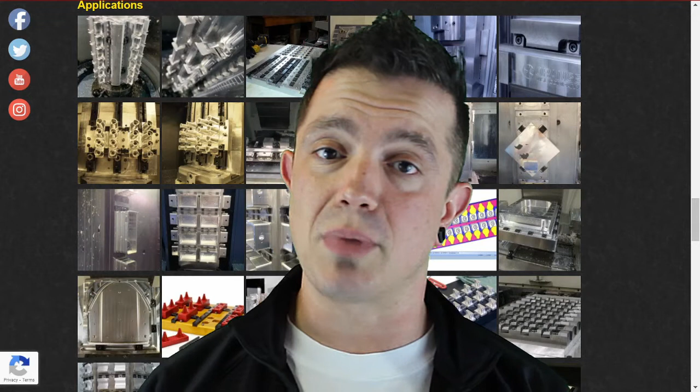Improving your spindle uptime. Now, whether you're an OEM manufacturer or you're in a job shop, stay tuned. I wanted to go over some tips and tricks for clustering parts. Now, if you've been online looking around for more solutions, you may recognize the website behind me. I, of course, am today going to be showing you a little bit about MiteeBite.com.

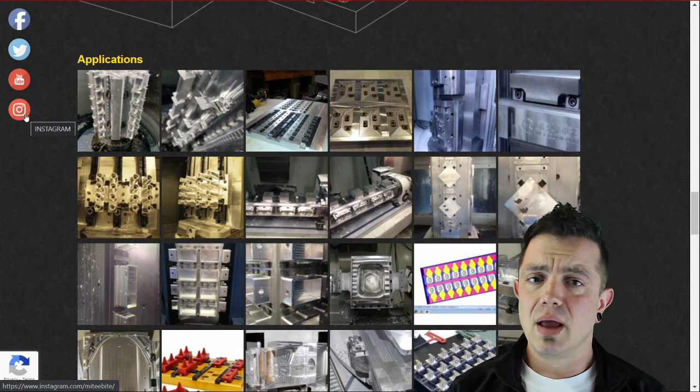I love their website. One of the reasons is they have application photos. Another reason is if you go here to their social channels, they've got more application photos. And it's great to have ideas when we have a lot of parts coming through to kind of stimulate the brain. And they've got a bunch of applications here where you are able to find different ways to hold different

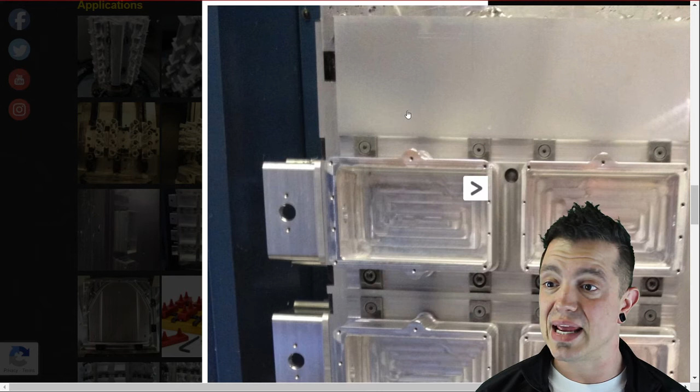parts. Now, some of you might be tuning out because you think this only applies to OEM. However, I promise there are principles you can employ at a job shop to still translate over many jobs instead of getting very specific. Some of the options here, they're on horizontal tombstones. Now, it does not mean we can only do these on horizontal tombstones. These applications can be taken to verticals in a pallet change type system.

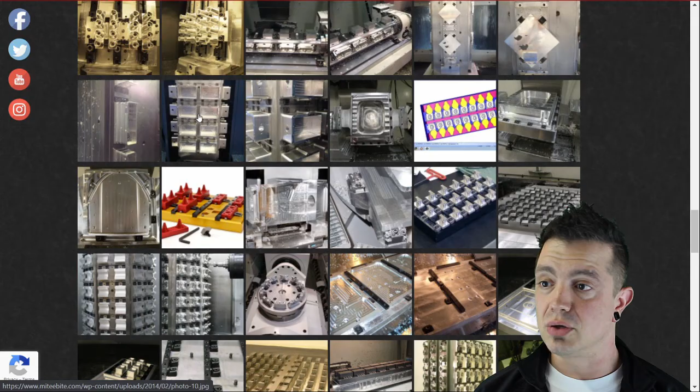Now, it doesn't mean you need a pallet changer. There's other solutions for that I'm going to touch on a little later in this video. Whether you're running bigger casings like this, or you're running a horizontal and you're trying to cluster parts so you can get milling into multiple stations at the same time, it's always a great idea to consider clustering. Of course, if you're doing a very small run, you might want to think about it a little bit differently than these very finite solutions here.

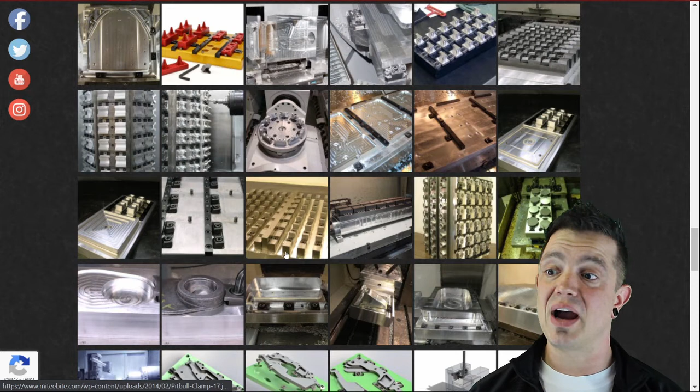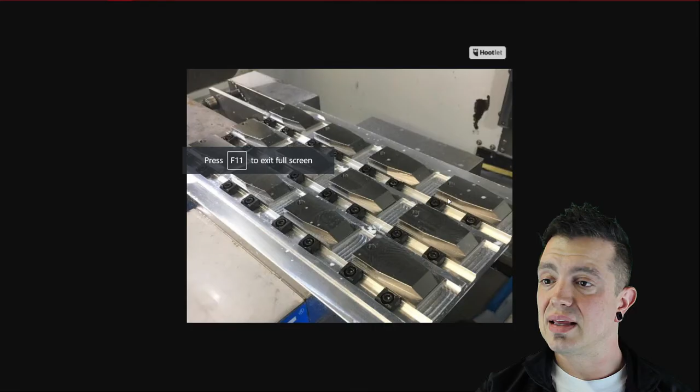One of my favorites, of course, is the Pitbull clamp. It's extremely versatile, low profile. Honestly, using these clamps a lot of the time, I just order the stock a little bit higher so I could hit 5 sides of the part, flip it over, face it off, finish whatever I needed to do on the back side. Here is another example. This time they're just holding the fixture in vises, which is a solution instead of removing the vises to set up your vises to accept fixtures.

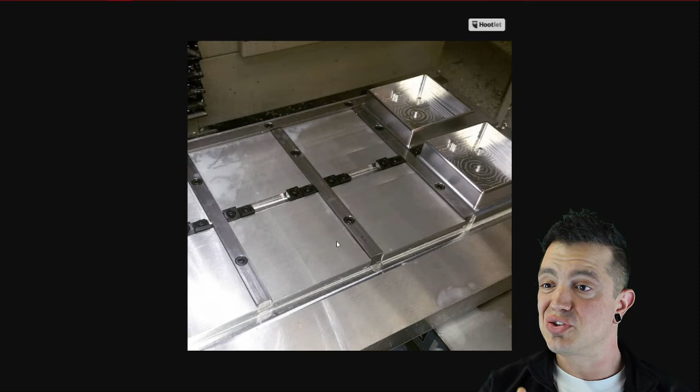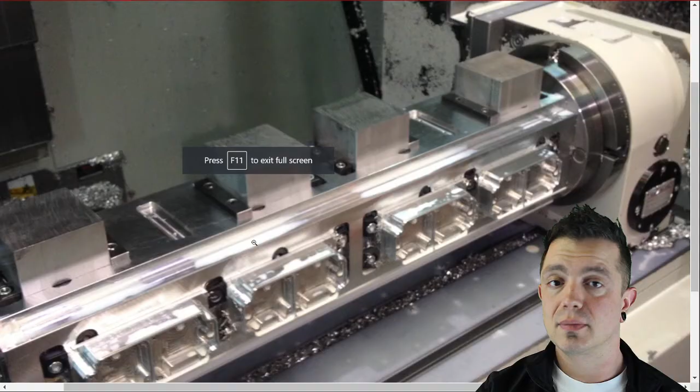Looking at this fixture setup here, you'll see they've got the finished parts up there. These ones are empty. Something to consider here is whatever material you're using in that size, it doesn't have to be the same part. I've got some more examples of those. Here's an example on a rotary fixture where they've got it lined up. They've actually got different part families on each side of the rotary.

Again, when you're in a certain work size, I had a lot of times where parts would come in and I could use technically slightly smaller stock. When you're talking about saving an 1/8 inch or a 1/4 inch worth of aluminum, but adding to your setup time and your processing time, it's not always an equal trade. When you can bulk cut a bunch of material or have a fixture like this that accepts certain material sizes, there's a benefit to not always shaving the most material out of the job. It's one of those penny wise, pound foolish kind of situations.

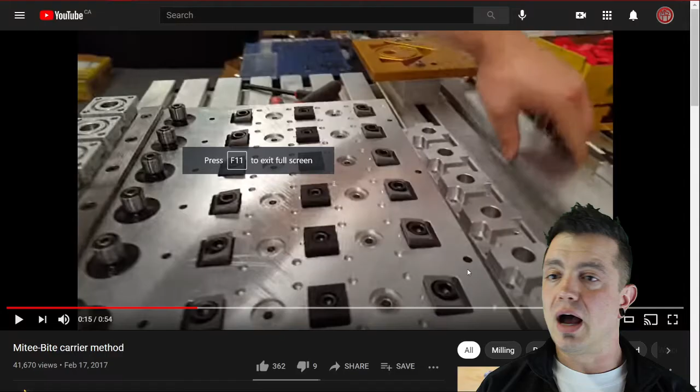This is a video you can find on the Mitee Bite YouTube channel. It goes over it a little bit more. I wanted to point out a couple things here. So you can see over here on the left-hand side, they've got ID clamping mandrels. Now they have the top lock version, so you'd need to have a through hole here. However, they also have a side lock version where you can lock it from the side.

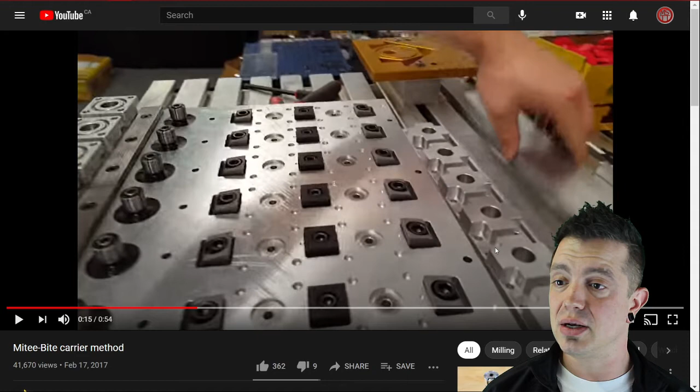You'll notice they've also got rail spots here and then the previous part completed down here. But watch here as they pick up this rail of material and then you lock it in.

Now, regardless of what parts you're working on, if you have a strip of aluminum and you come down and you make all your little tiny widgets out of a rail, then you can just pull them out. And if you've onion skinned them, then you can just pull them off and deburr them or have someone processing them, putting them into another operation to finish.

A lot of the time, parts that you choose to do this with, it's best to have them complete, done in one, counterbored. So like if you're drilling, tapping, counterboring from the top side of a part, making a T-nut or a shape like they've got in the background here, it's a great solution to save you time and again, cluster more parts.

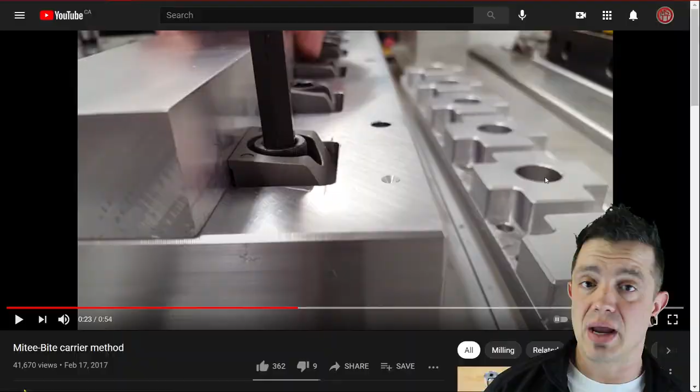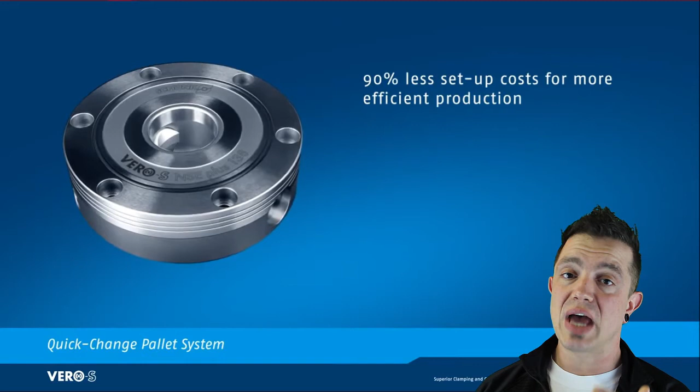You might be thinking, Arthur, that's great, but it still leaves my spindle not running and my door open for a long time while I'm messing with all these Allen keys. And you'd be absolutely right. Something to consider in those cases is a quick change zero-point system like Vero. I talk about Vero a lot because it's the absolute fastest, and the biggest way I help customers save money is by reducing their spindle downtime. I do that by focusing on doing all the work outside of the machine possible.

So you can see there, Schunk sells pre-made pallets. However, you can also buy the pins on the bottom and make your own. You can put these pins into any fixture you want, including examples like I was just going over with the different Mitee Bite clamp. The repeatability at 0.005 mm means you never have to really worry.

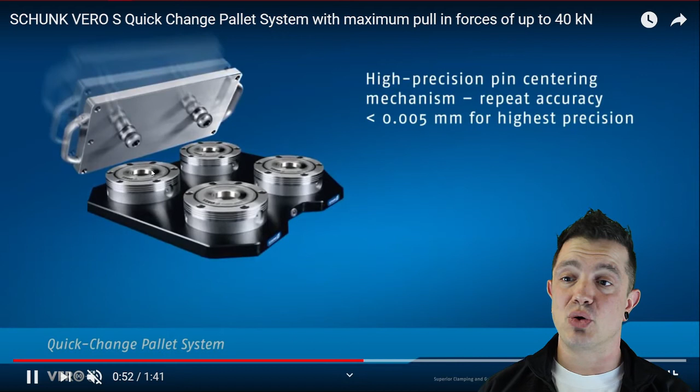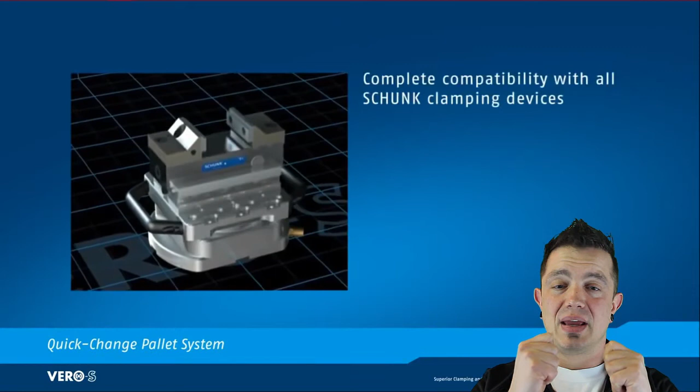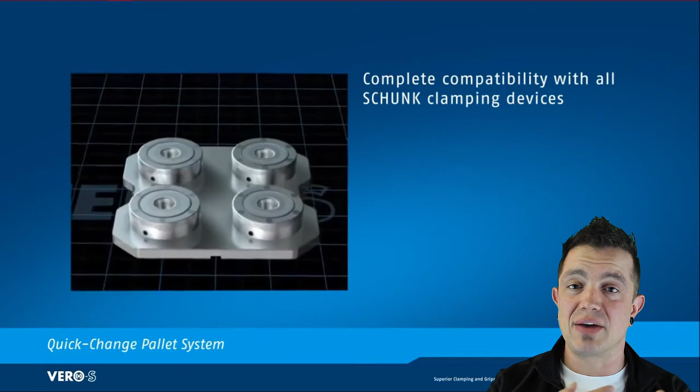The beauty of a system like this, while you have the quick changes, you literally open the door, you pull the pallet off. You put down the pallet because you run double pallets, and you close the doors, hit cycle start. After that, you're messing around with all the work holding, all the fixturing, everything else. If you've got raw stock and you've got a lot of clips like the Mitee Bite or a rail set up, then that gives you the benefit of being able to clean that off and have everything seated and clamped just right with the pressure.

If, however, you have a high handling finesse mounting system for a second, third, or fourth operation, it gives you time to do that while the doors are closed and the spindle's turning and earning you cash. This is a great way to maximize your spindle uptime. You could run your machines at 70, 60% uptime and then invest money into a new machine. There's nothing wrong with that. However, the first stop is to check, am I maximizing the possible uptime on the current machine?

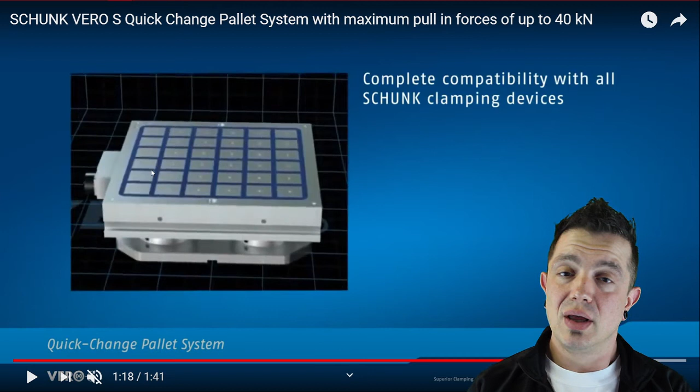If you have nothing but verticals and horizontals with 3 and 4 axis and you're looking to add a 5 axis plus machine, it totally makes sense to focus investing on that to increase your capacity. However, if you've got a lot of machine already and you've got open tables, there are ways you can fixture to improve your spindle uptime and reduce your part handling. Whatever you can do to put more money in your pocket first before a capital equipment expenditure, I'm gonna help you do. Of course, that comes with a caveat: do not tell my boss.

I like to share different ideas and ways to improve spindle uptime because yes, you know what, there's a bunch of different tools out there. Yeah, there's a bunch of different ways to skin a cat, if you will. The one consistent rule is if you're putting all this money in tooling, but your door is open and you're getting 50, 60, maybe 70% uptime on your spindle, there's other places you can gain more money.